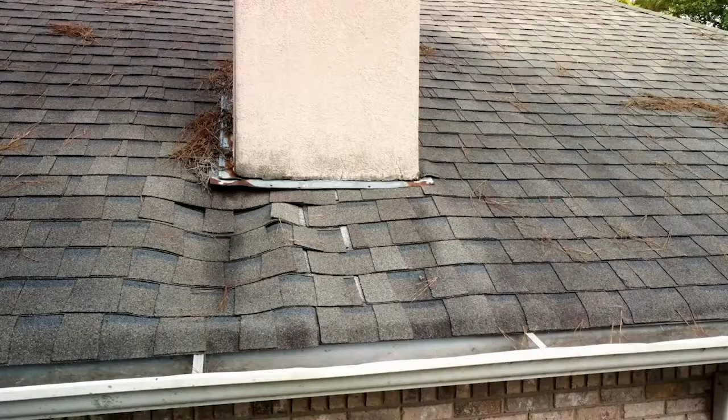Sam, why should roofing contractors care about ventilation? Well, I think there's a few reasons that you need ventilation. The biggest being it prevents cold weather condensation that can really affect the life of your roof. And that can happen in, I think, 3 different ways. 2 of the biggest ones being heat and moisture buildup - heat in the summer, moisture in the winter. And then the 3rd biggest reason is it can prevent ice damming. So we all know that ice damming can damage your gutters, it can damage your eaves. So ventilation will really help prevent that.

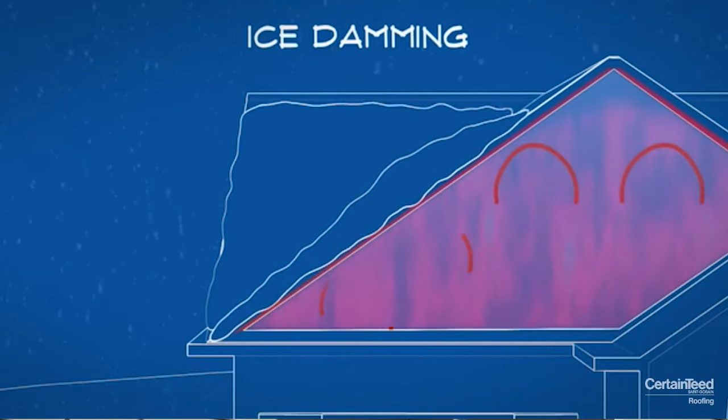And when you're really looking at that why ventilation too, like you said, it's all the time - summer, winter, year round. But it really is important to help homeowners also reduce energy consumption, lowering cooling and heating bills.

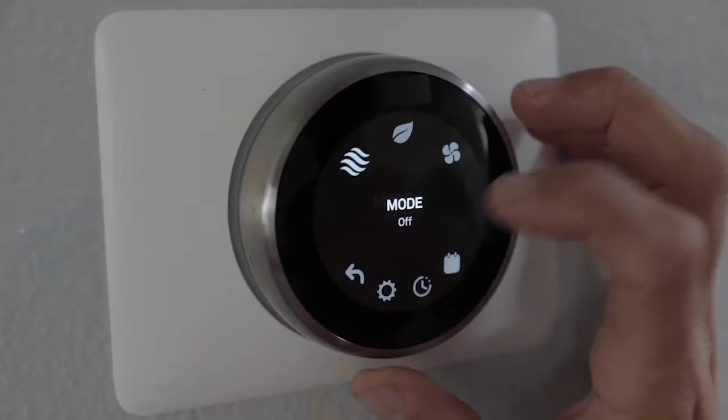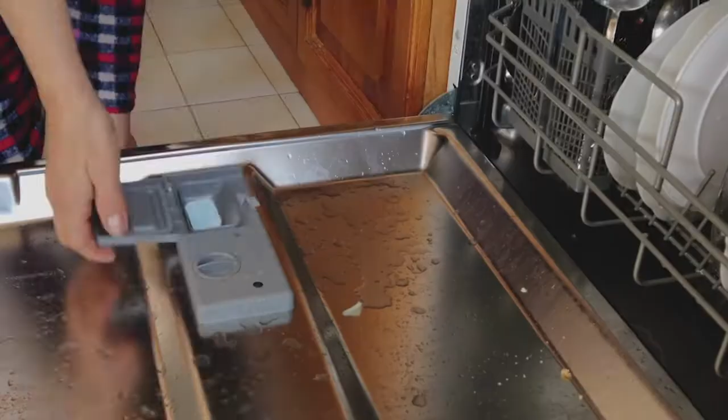Oh absolutely. Heat in the summer, you have the sun beating down on your roof, that's causing that air up in your attic to get very hot. In the winter, moisture from the shower, from laundry, from dishwashing is causing all that moisture to go up into your attic. So it really needs to find a way to escape so it's not lingering in your attic. And when it does linger in the attic, what happens is basically you're going to get rot and mold and terrible damage - damage to the materials, damage to your roof.

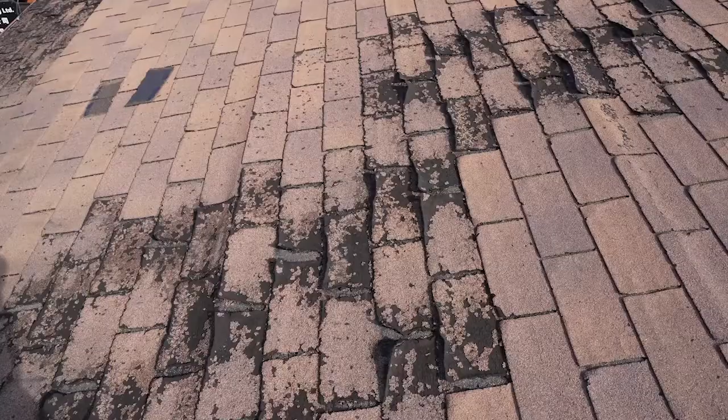Yeah, I think a lot of people underestimate the heat that can happen in the attic space, what it does to the underside of the roof and the shingles. Oh absolutely, yeah. It can really damage the underside of your roof, damage those materials and the structure of your house.

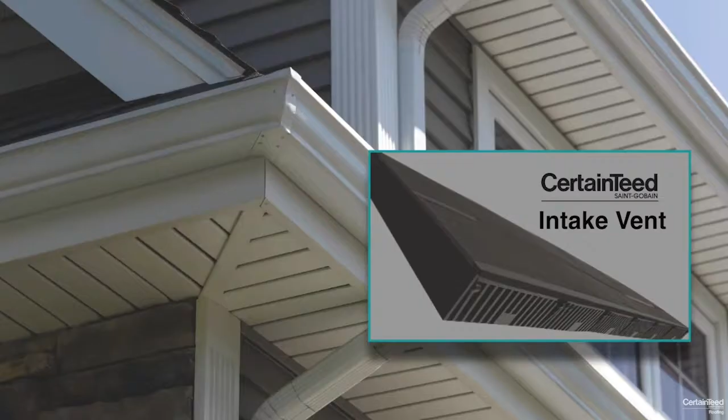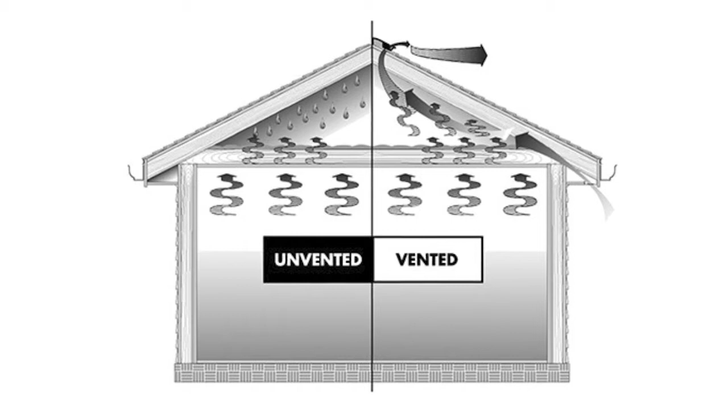So Samantha, can you talk to us about how that works, the balance of intake and exhaust? Right, so you really want to have both intake and exhaust ventilation working together. Hot air can sit in your attic, and without proper exhaust it can just sit there, it's not circulating around. It can come from your heat, from the shower, from doing laundry, or air can circulate around the top of your attic, leaving stagnant air at the bottom without proper intake vents. So they both really work together to create a constant and consistent airflow. Without it ventilating out, it can just sink or rise and be in the wrong place without it getting through the ventilation.

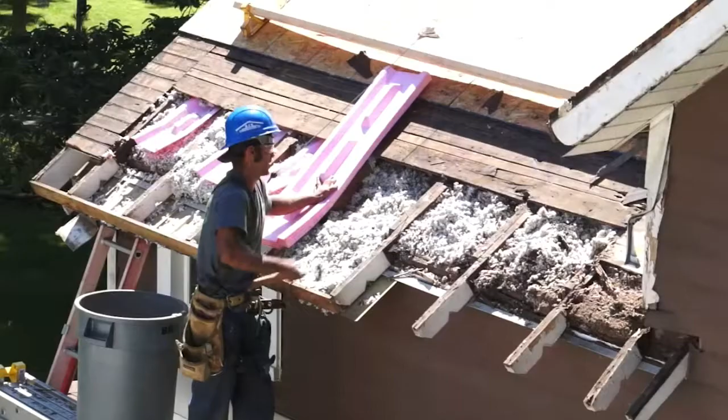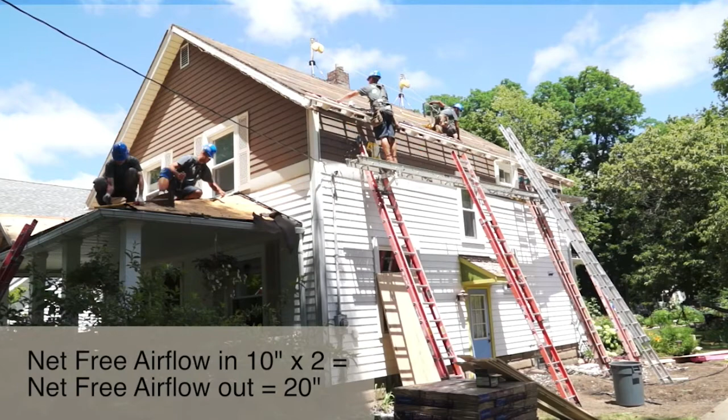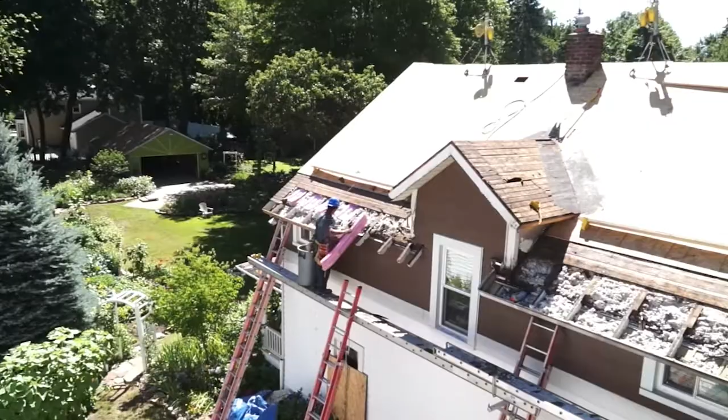So as you're looking at proper intake, how does that work? Proper intake at the soffits and eaves will just move that air through your attic, and then it'll go to the top of your exhaust vent at the top. So a balanced vent system is really accomplished by placing those intake vents near the bottom of your attic space at the soffits and the eaves, and then the exhaust vents would be at the tops, the peaks, the ridges of your house to get that air out of there.

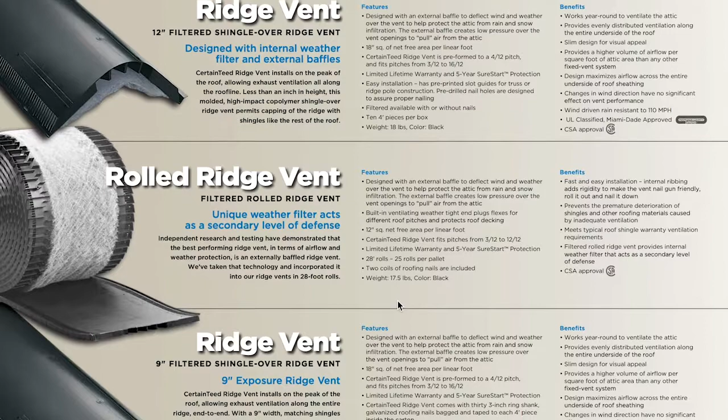What are some of the recommendations you have from CertainTeed on those types of vents that they're using both for intake and exhaust? We usually recommend our intake vent. We only offer one intake vent to make it easy for you. And then we have a variety of exhaust vents, including our ridge vent that comes in 12 and 9-inch widths. We also have a rolled ridge vent, and both of those come in filtered or non-filtered versions, so you can use any one of those as an exhaust vent.

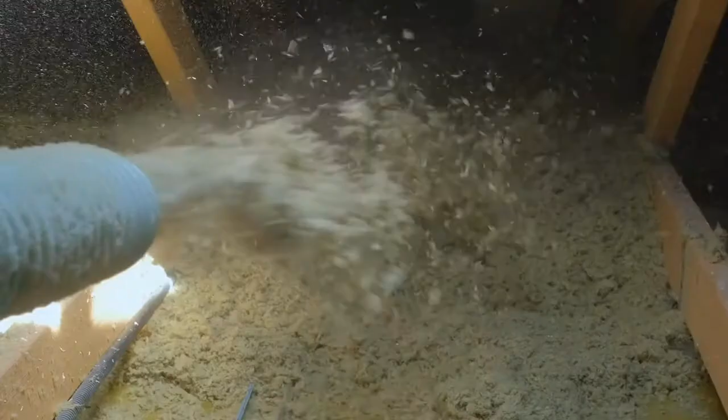Now, a lot of times when roofing contractors are putting in intake and exhaust, when they first put it in, it's all right. But over time, homeowners can move things in front of vents, and that can cause all kinds of problems, right? Oh gosh, yeah, you can move things in front of it, or even the insulation can block it. The insulation can block soffits, creating more air buildup in there if it has nowhere to escape, so you want to make sure you're not blocking that either.

Yearly maintenance is important, exactly. And then how about weather?

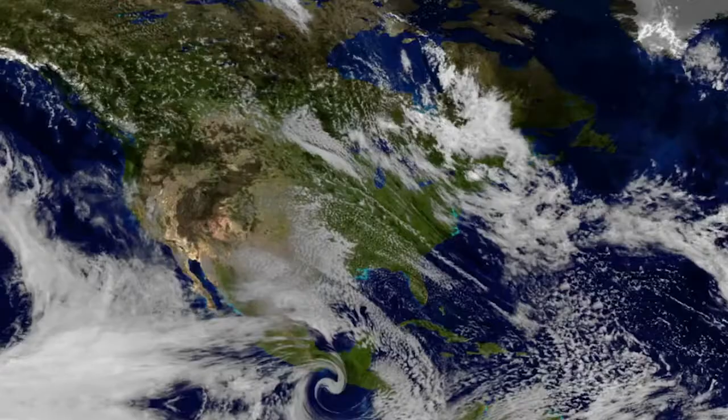How can weather affect your intake and exhaust? So like we said, air can get constricted if you're blocking your soffit vents, or if there's only vents on one side of your attic. It's similar to the effect of opening windows on one side of your house on a breezy day - that air is not going out anywhere, it's getting trapped on the other side. But if you open windows on both sides of your house, the air can pass through easily, and that's the exact same concept with ventilation, just at the top of your house. Right, and it keeps everything nice and dry the way it should be. Exactly.

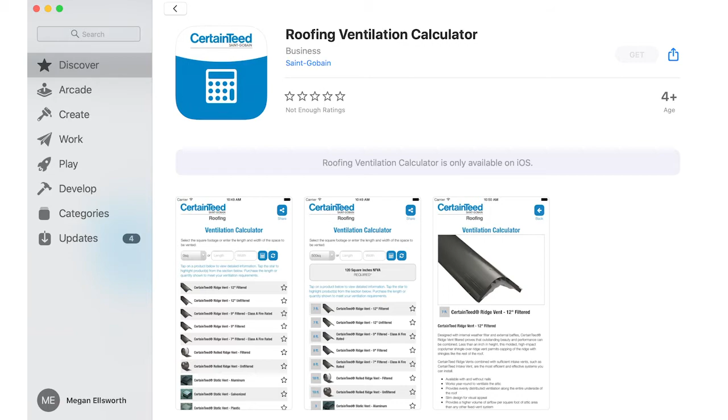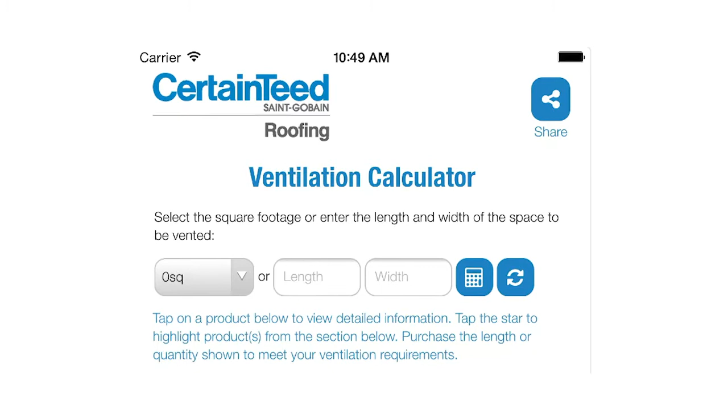Sam, how do contractors really calculate how much ventilation they need? Well, luckily we've made it easy for you. We have a CertainTeed ventilation app, so you don't have to do a ton of math. To use the app, you'll need the total square footage of the space you're ventilating. You input that into the calculator, and it will output the number of intake and exhaust vents you will need, based off of the NFA 1/300 rule.

Excellent, so they're going to be able to meet building codes and make sure they're doing everything correctly for that homeowner. Yep, exactly. And then they can even print it out or email it to the homeowner or to other people on the job, to let them know what's needed as well.

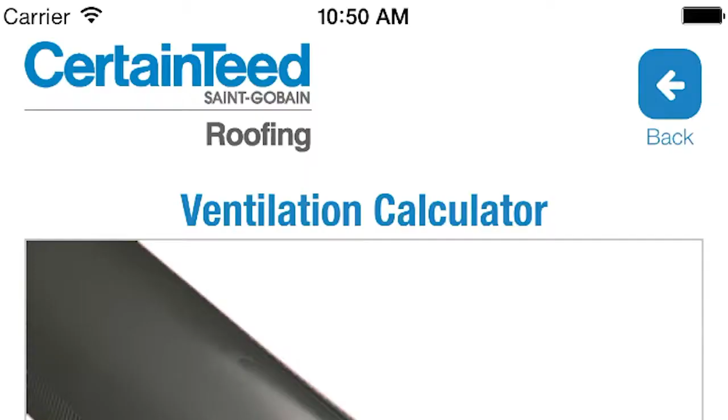And I understand also on the app there are resources. Yes, exactly. We've got all of our products listed on the app with individual product pages that tell you more about our vent offerings, so you can find the right ones that you need.

Having somewhat of a sales and marketing mind, and knowing a lot of people watching this are probably in sales or at the front desk having these conversations with homeowners - this is really an important sales tool to show the homeowner the app and how it's being calculated and why. Maybe talk a little bit about how contractors can use this in their homeowner sales.

Well, exactly. Those salespeople at the front can use it, but a lot of people are on job sites too, and you want to be able to do it very easily. You don't want to have to sit there and handwrite how much is needed - this way you can just take a couple quick measurements, put them in the app, and you're done, then send that report to the owner. You can send it to the homeowner, to other people on the job site, or people back at the office if you're out.

Yeah, that's excellent. So often we kind of separate sales and marketing away from production or operations, but when you put it all together in the roofing company and say, hey, look at this great tool we have, it's going to give us the correct ventilation to meet building codes - we need to share this across the board.

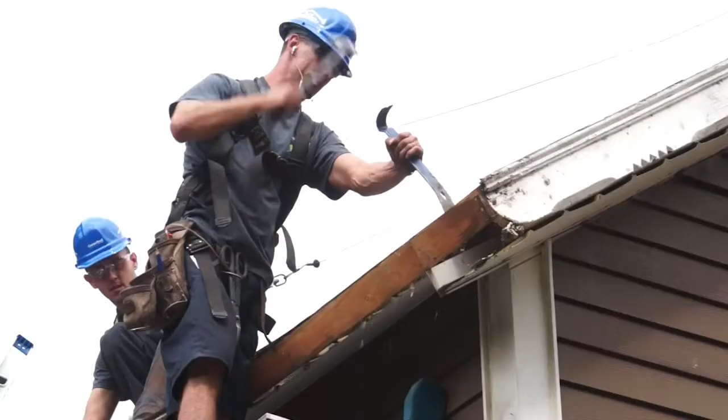I think that how to calculate is our third learning objective, but there's another learning objective: how do you take all this great information and use it to not only educate your homeowners, but help them through the process and give them peace of mind that their home is going to be safe. When ventilation is not properly installed, you can have real fears of an unhealthy building.

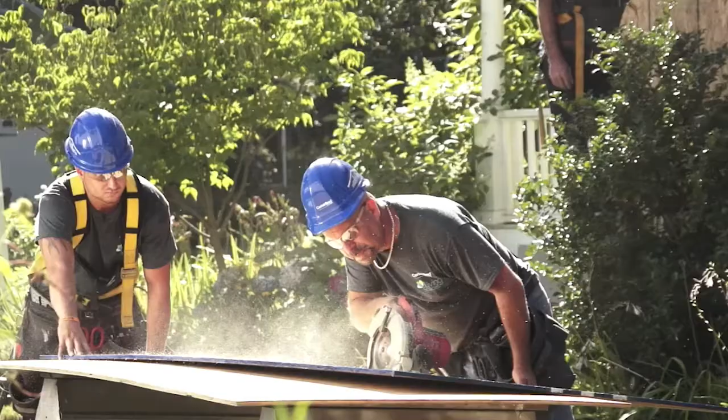It can cause moisture buildup, mold, mildew, all those things you don't want to breathe in. If it's not installed properly, you can get leaks, damages, and then you'll have to redo it all over again. I don't like that last piece. I know, and you don't want to do that.

There's a lot of homeowners and building owners that are actually very educated on safe homes, healthy homes. I know I've said this a bunch of times, but I think it's so important: the conversation of ventilation needs to be front and center with all of your owners. And with CertainTeed, using this app, you're able to not only calculate, but share all that product information with your customers.

For the contractors out there, I know you have a lot of great resources at CertainTeed, including brochures, the calculator, and articles that can be shared with homeowners. We're going to have those on the screen for this lunch and learn so people can see those and be able to get them. But what do you recommend for roofing contractors and companies who want to learn more beyond this lunch and learn? How do they reach out to CertainTeed, and how do they bring the ventilation topic into their overall business?

We have a ton of resources on our website, certainteed.com. We've got individual product pages for you to check out all of the ventilation products we offer, plus blog posts, articles, and videos on our website for everybody to get more info. I also really recommend the ARMA website.

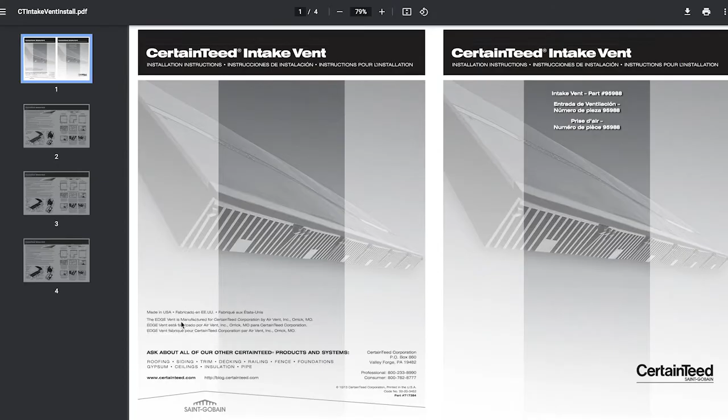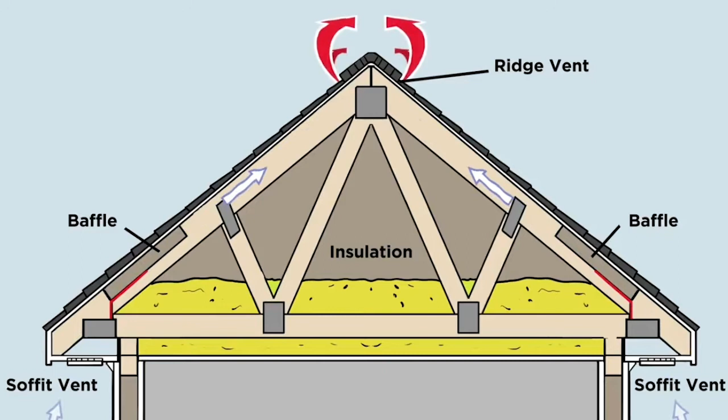They have a great video on how to properly ventilate your attic to protect your roof, so I highly recommend that video as well. Or you can work with your local CertainTeed territory manager or sales rep, who can also point you in the right direction for ventilation.

I love the fact that you're bringing ARMA to the forefront too, because for roofing contractors who don't know, that's the Asphalt Roofing Manufacturers Association. Yes, I think I said it right. And it's a great resource to use with your homeowners - it's third party validation out there of how important this is, and they do great work in the industry. So I think that's an excellent recommendation. Yep, absolutely, we use them all the time.

For everyone out there, this is what you need to be looking at: ventilation, all kinds of resources. You're going to see those included here with this lunch and learn. You have the expert Samantha Gillenwater, who can bring any information you need, or get with your local CertainTeed rep. As we look at what we went through today, and on your discussion sheet, talk about why you need ventilation as your first learning objective, and look at how you can spread that throughout your whole company and to your customers - most important.

Then the importance of balanced intake and exhaust ventilation as learning objective number 2, and how you can work together to explain that to your customers. And finally, the tools you need, which is the ability to calculate ventilation, our third learning objective, and that includes the CertainTeed app, which you can download, plus all of the brochures and information that is out there.